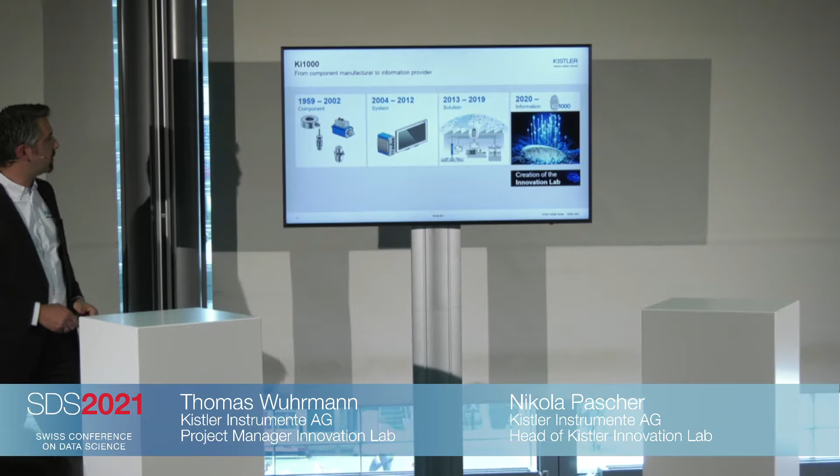Kistler has quite an evolution behind it already, starting in 1959 as a component supplier, so pure sensors and not much more into the whole measuring chain. This lasted for a couple of years, but in the last 20 years there were several transitions taking place. By 2004, the company made the transition from a component to a system supplier, which was enabled by introducing several powerful platforms, such as an embedded platform and software corresponding to it. The next step was the step to a solution provider.

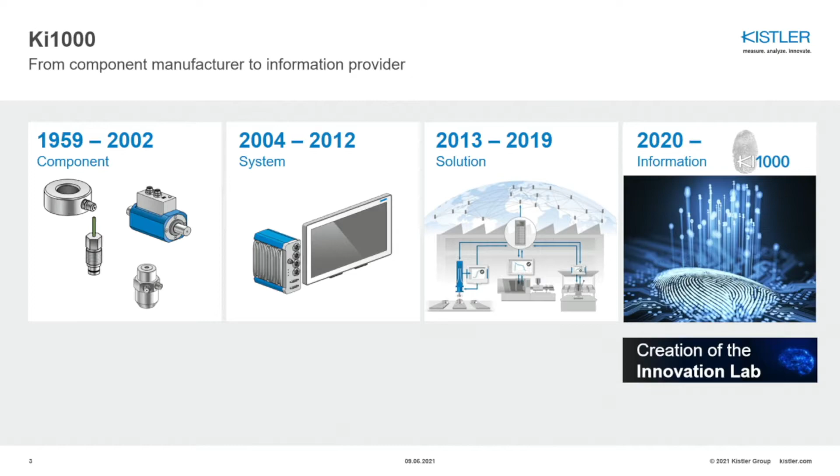This was basically the step towards IoT business and cloud business. The most recently taken transformation finally ended up in becoming a provider of information itself, so data-based services mainly, and also our digitalization topics were touched in that transition. Exactly by that time, the creation of the Innovation Lab was done in order to push those digitalization steps into the way of data science.

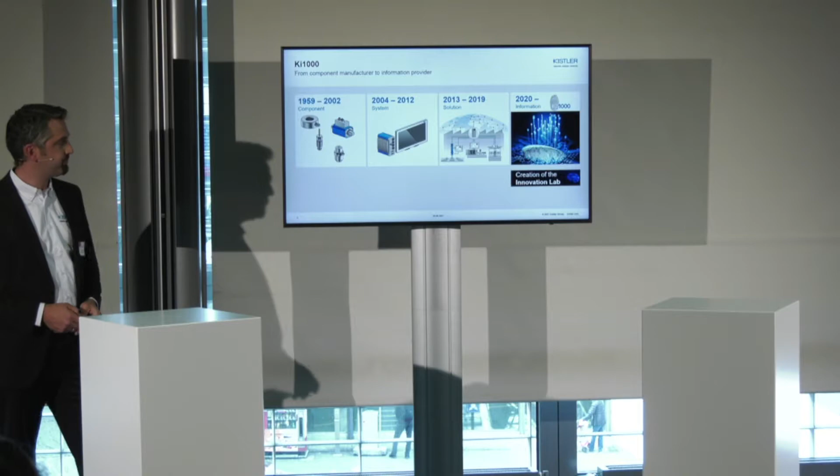Turning data into value. That's basically the vision behind the Kistler Innovation Lab. We want to unveil the full potential of the data by combining sensor technology, where we are strong from the history, including domain knowledge and data science.

Kistler started in very small niches, expanded to other niches, but also expanded in more and more applications around those niches. What was missing so far was the data science part, or actually it was just done within our own conceptions, but not focused. This is one thing which was really introduced by the Kistler Innovation Lab.

What is unique about Kistler is also that we have experts in every field, such as the tech side. We have a strong technology stack, starting from the sensor to the data acquisition systems, data management systems, but also analytics. We are also in various applications, so we have a broad field of expertise in domain know-how, which is key to success for most of our projects. Obviously, we have strong business support as well. All in all, the shared strategy and goal is key to success.

The project I'm going to deep dive into now is luckily located in Kistler itself. We actually had a customer in the production of our own sensor production. So the domain business was strongly pushed from that side, and we had easy access, which is not always the situation in such data science projects. The tech side was mainly driven by the Innovation Lab, but also supported by several other departments. Finally, the business side is covered by a focused business unit called Advanced Manufacturing, which serves exactly such situations with sensors and data acquisition systems, or even complete solutions.

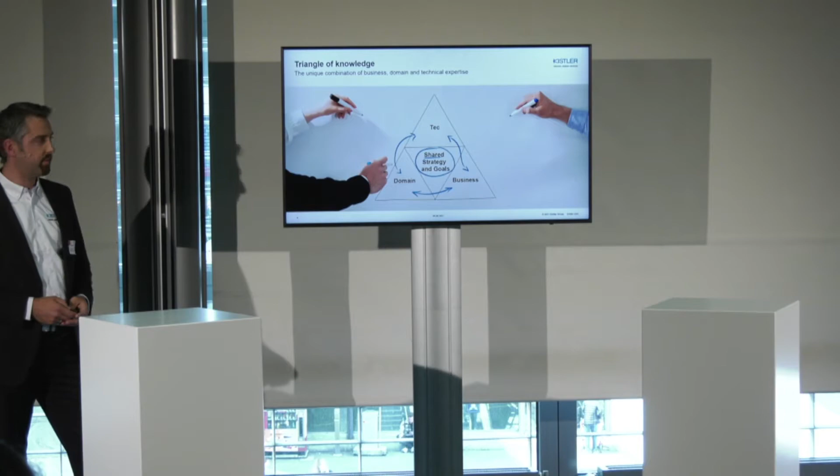Okay, so let's dive into the project. As a start, I want to quickly show you a video which explains quite well the whole situation and setup.

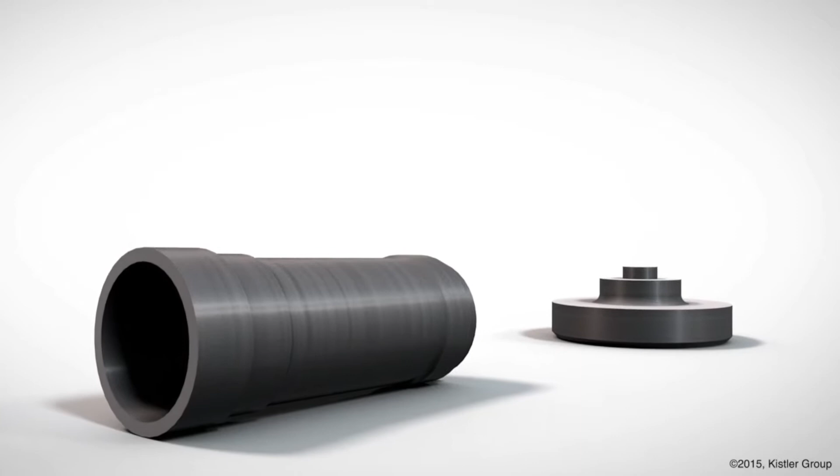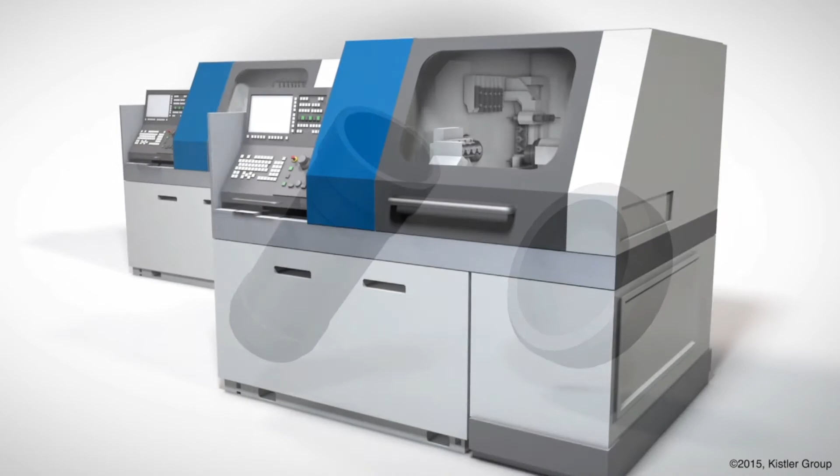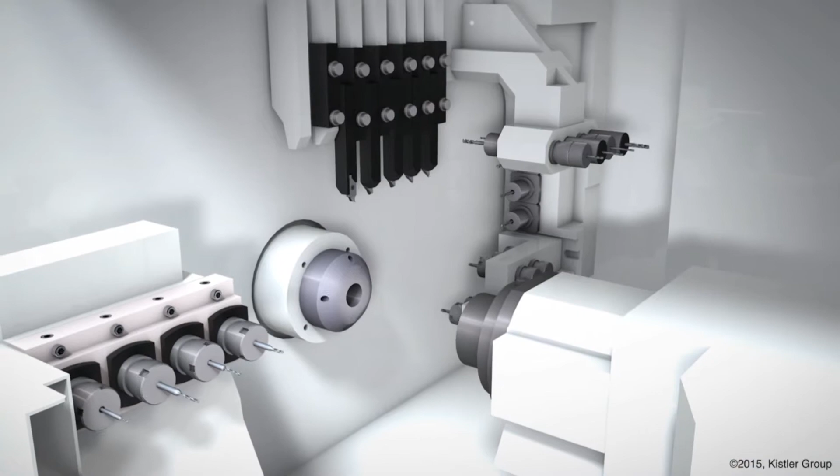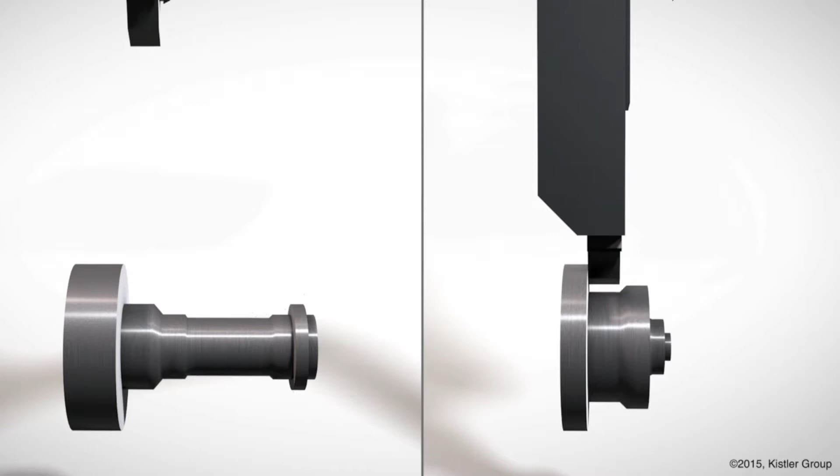The production of very thin-walled and small workpieces with wall thickness of only 0.035 millimeters is our specialty. They are usually made of high alloy steel or superalloys. The production of these parts can only be realized with precise computerized machines. Our mechanics' core task is the manual production of highly precise tools and the setup and programming of the CNC machines. Setting up and tuning the machines can take up to 5 hours. By contrast, completing a workpiece only takes about 2 minutes. Most of our workpieces have a diameter of 0.3 to 10 millimeters. The smallest drillings that can be completed true to size are 0.2 millimeters. Already, the smallest force effects can cause deformations and make a workpiece unusable.

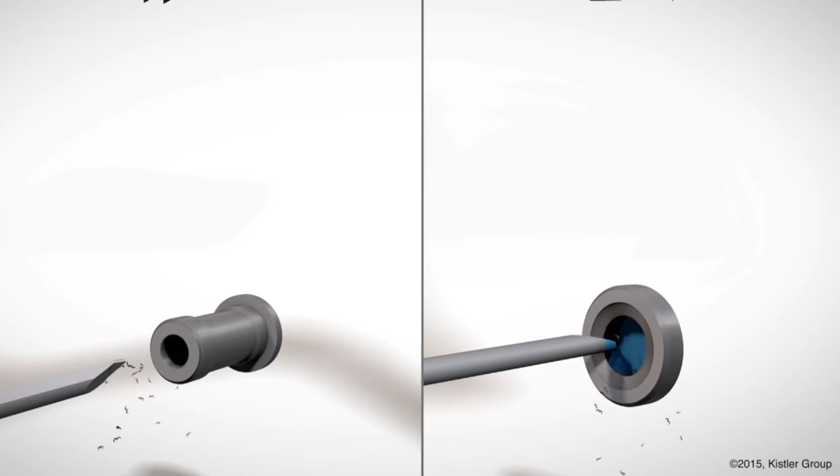Our workpieces are continuously monitored during the production process. We only allow deviations of a few micrometers, which are invisible to the eye.

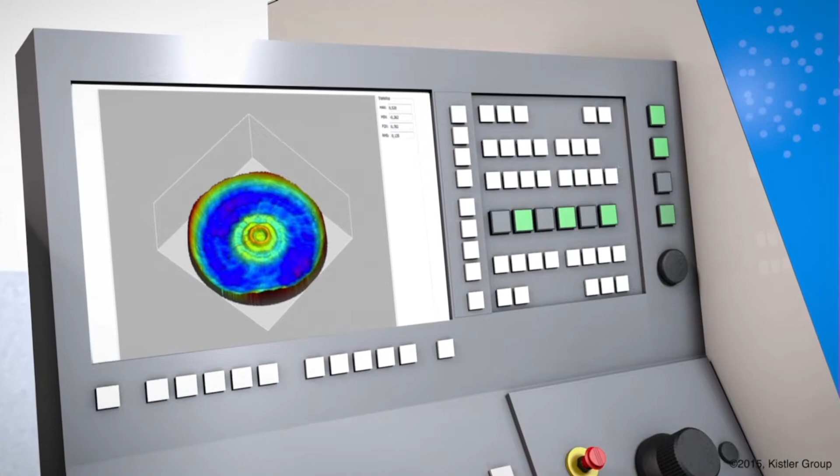The slotted spring pin, as well as the membrane, are the centerpieces of our sensors.

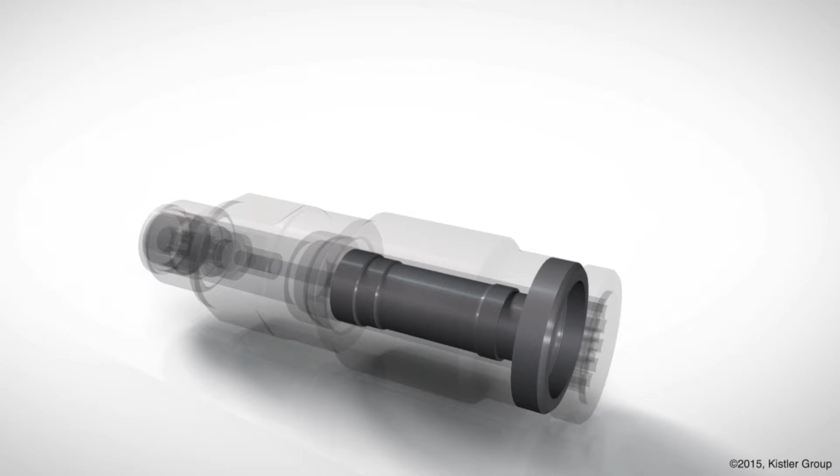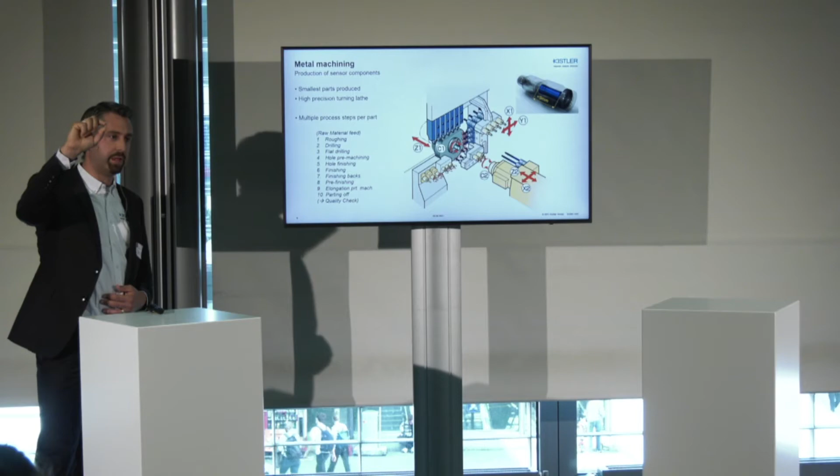What did we see in that video? I want to point out some things. First, this is actually the piece of metal which we are going to produce. It's really small, and the maximum dimension is just a little bit below 1 centimeter. Such high precision tooling is only achieved by high precision turning lathes, the machine itself. On this side, you can see several drillers, but also cutting instruments, and the whole machine is completely automatized.

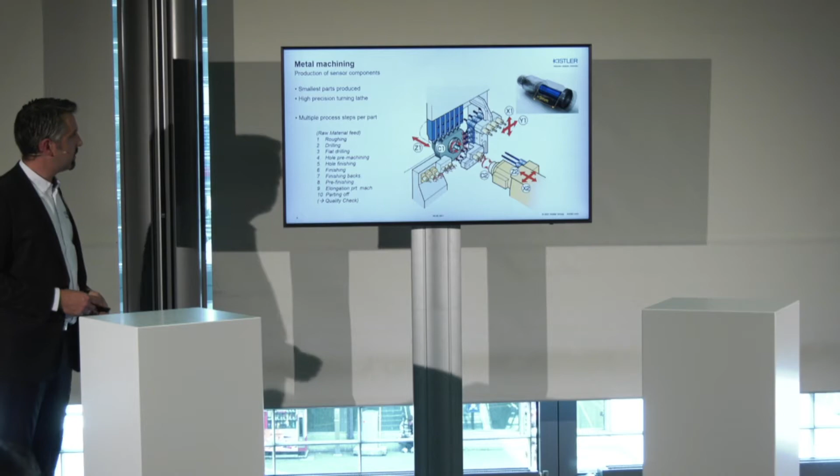Now coming to the process in more detail, producing such a piece involves a sequence of process steps. Starting with the raw material feed, there's first roughing and drilling, then fine-tuning, surface machining, and finally parting off, followed by the quality check.

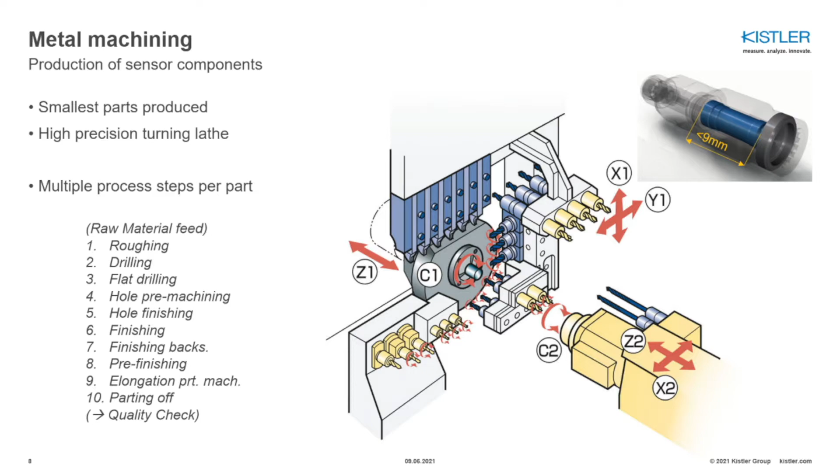The challenge is exactly around those points. We have several process steps before we even have the part finished, so in every process step something can go wrong. On the other hand, quality is actually checked just subsequently. So whenever we start producing a part, we're having the quality check at the same time. In the worst case, we're about to lose up to 3 or 5 parts if the quality was bad.

And the last thing is, for the same reason, the manual machine parameter corrections. They are actually done preventively or subsequently, since we rely on the quality measurements there.

So what is our goal? The goal was the prediction of the part quality already during the processing. On the other hand, and this is very important for the production itself and the development of such sensors, identifying which process step is the most fragile, causing an issue for the quality. In order to do so, we have to measure and analyze process parameters.

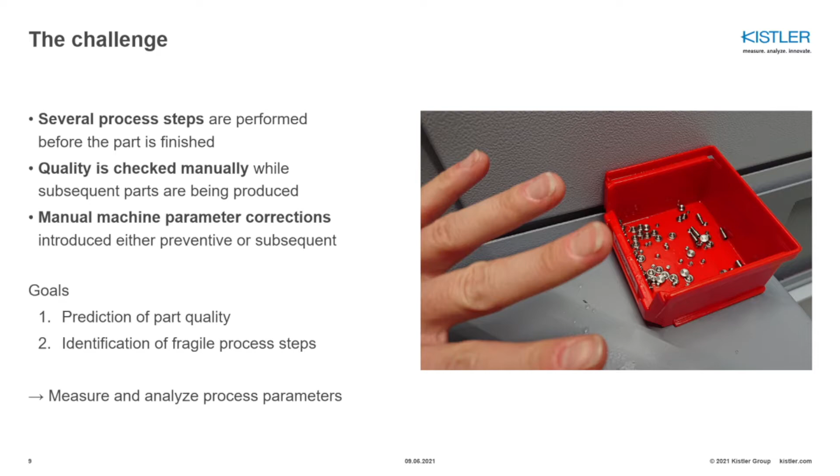So what is our process parameter in that case? The most relevant I want to introduce here. Think of a situation in your kitchen. You're taking your old knife, have a nice tomato, and you're going to cut it. You will get a result, but it's not very nice. So maybe you take a sharp knife, and it goes through the whole tomato like butter. Quality is good. That shows quite intuitively why cutting force, the force applied by cutting, is really an excellent parameter to characterize not only the quality, but also the tool itself. And that's what we are going to use.

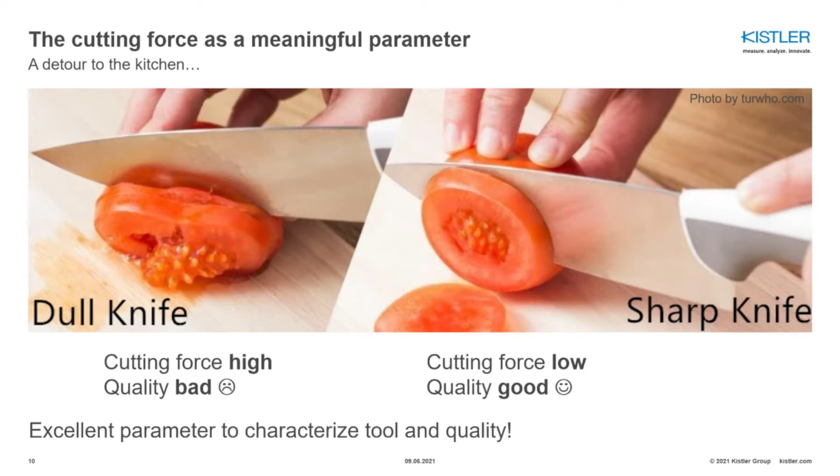So what we can do is take comparisons within such process steps, or also across multiple process steps.

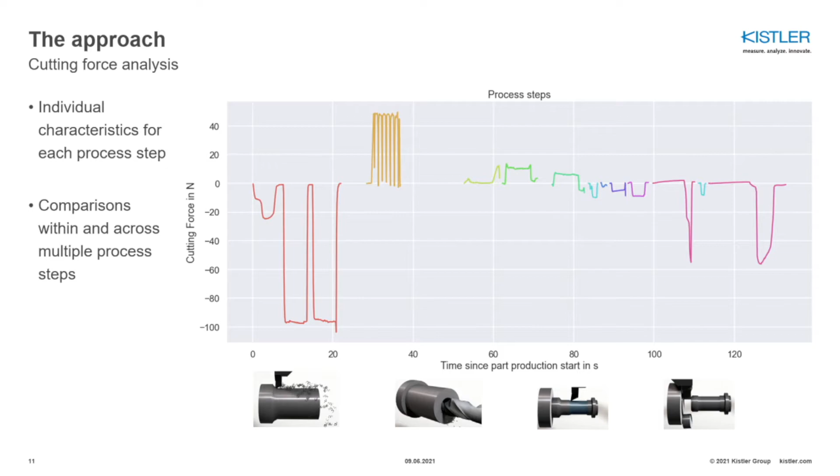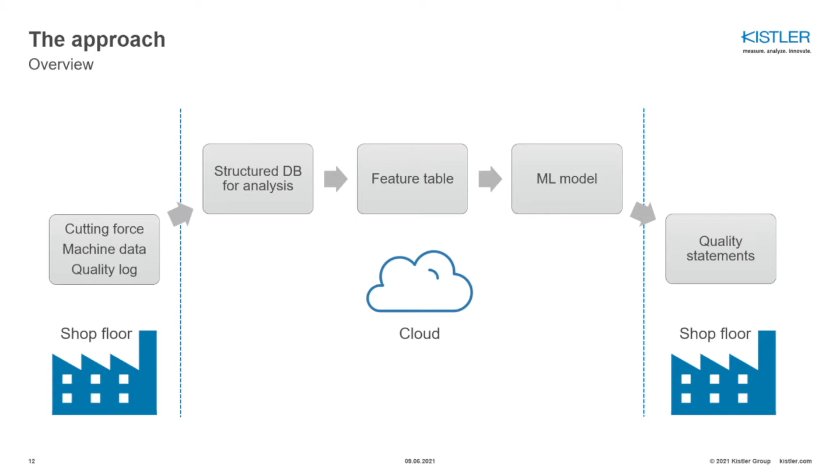And here I want to quickly introduce how we did the data-driven approach. As an input, we had the cutting force, but we also took the machine data alongside it. And finally, we get some labeling out of quality logs - though they are actually just a sequential list of findings corresponding to the parts.

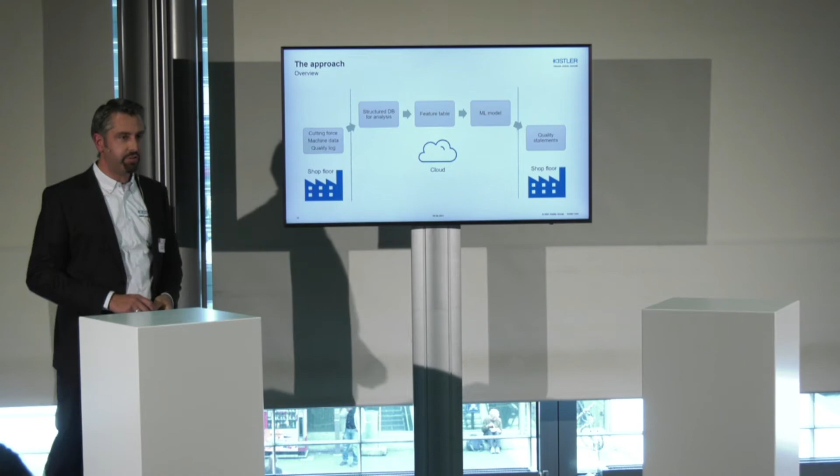So we leave the shop floor and go now out into the cloud environment, where we introduce a structured database for the analysis, which is the base for the extraction of features, serving a machine learning model, and finally giving back to the shop floor the results in terms of insights or reports.

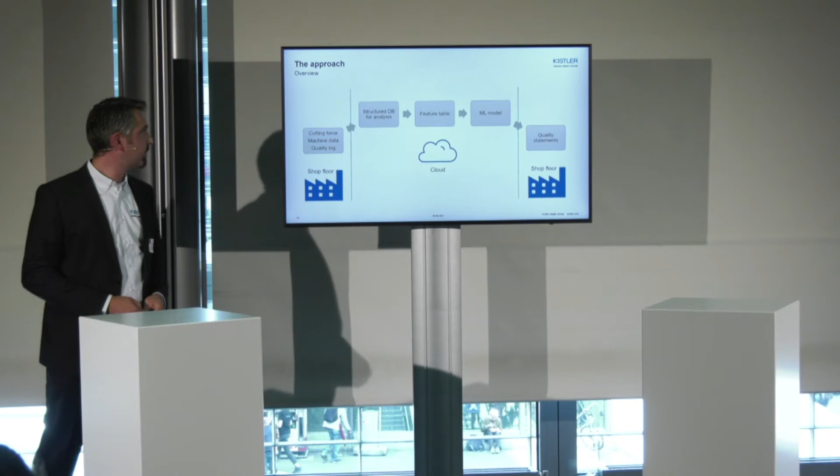So now we dive exactly into that one. Let's start with data preparation.

In here, the business understanding was very challenging from the very beginning, and we invested a lot of time on that. This is due to the fact that we first had to understand where such a part processing really started, and when it stopped. We had manual interruptions, several of them, just because the operator is doing something else to prepare the next sequence of steps, or it's stretching the whole process in terms of timing.

As an input, we had even unstructured data, continuous data, but also discrete data. They were not nicely matched. The quality log, as I already said, is just a list.

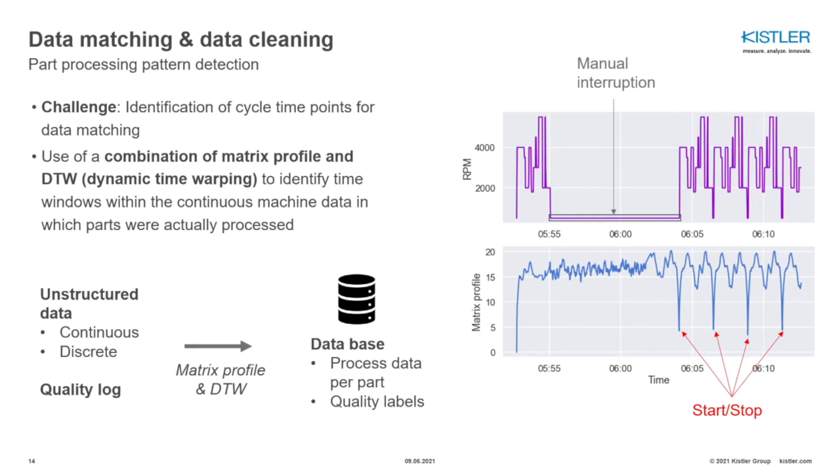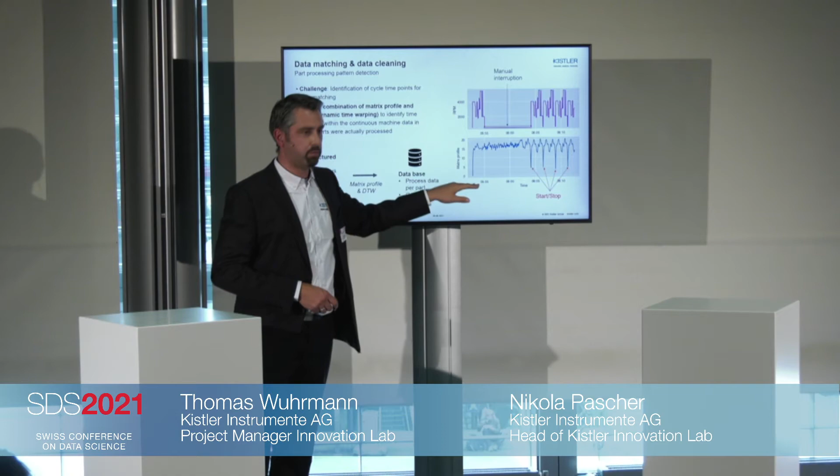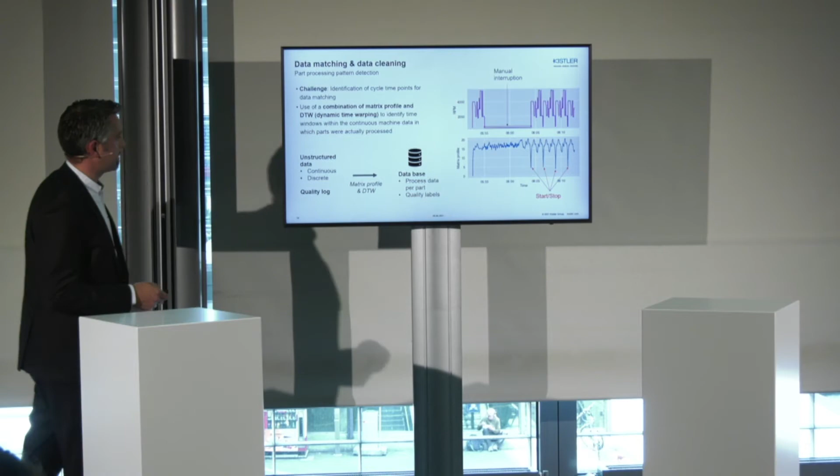So what we use is a combination of the method called matrix profile and dynamic time warping to identify windows of interest. On the right-hand side, you see the reference pattern, and the output of the matrix profile for a perfect fit would be zero. We identify start and stop sequences when the pattern is very similar to a reference. Finally, by that approach, we achieved a database for process data per part, all combined, with quality labels together.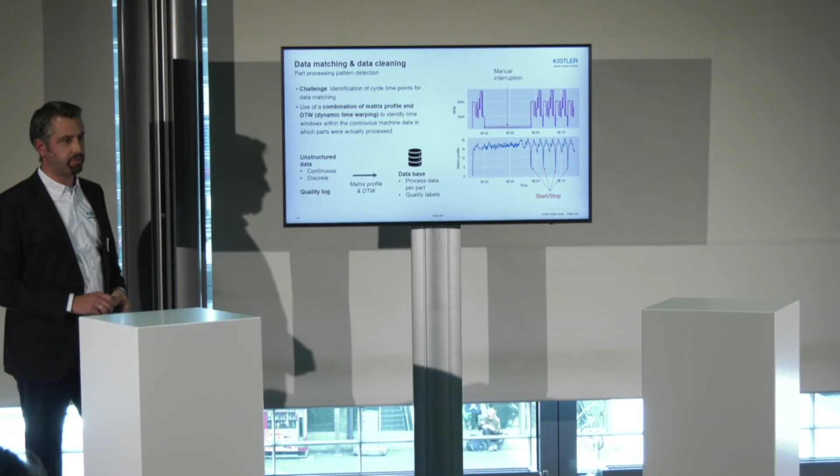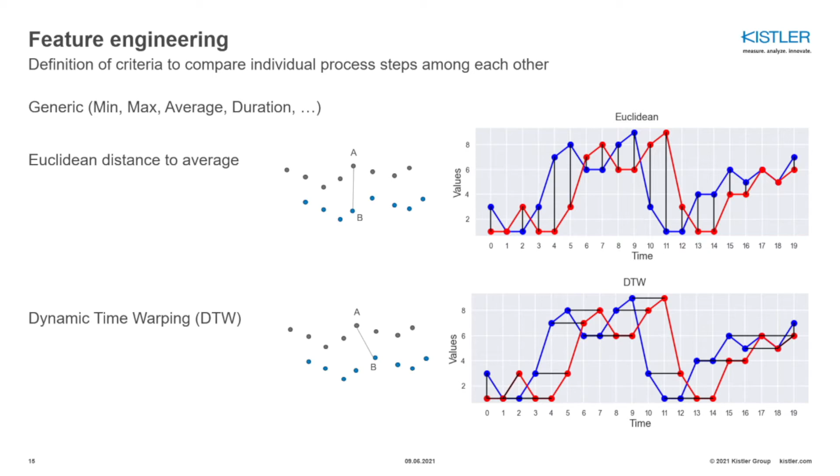Now I want to get a little closer to the feature engineering, which is again strongly driven by domain know-how. But for that approach, we also introduced generic features, obviously minimum, maximum, average. I want to point out two more: the Euclidean distance to average, which looks at the distance to an average on a certain sample time, and also the dynamic time warping, which takes into account time-shifted situations between a reference signal and a signal under observation.

So we have that feature table, with a lot of insights inside. Let's have a look at the evaluation.

Once again, the turning lathe is a highly engineered machine, so the process should generally be robust. But the cutting force is also an excellent parameter to get deep insights into the process.

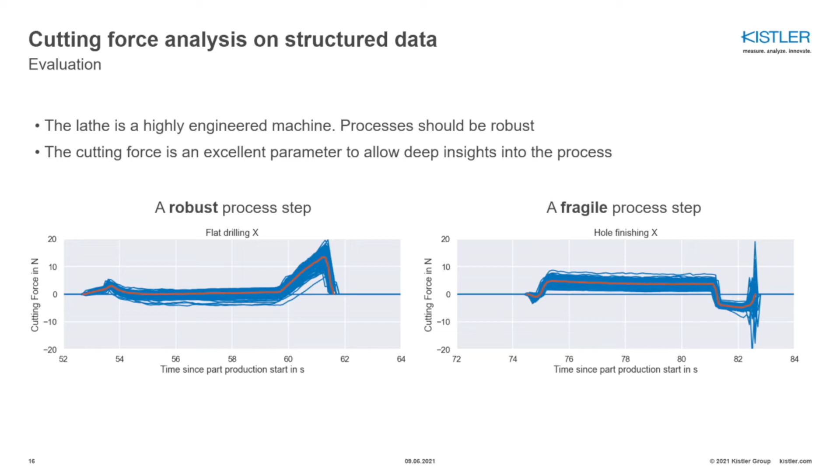As a visualization in here, one can already see on the left side a robust process. This is the red curve, the average pattern, and around it we have several single measurements of single parts. There is the deviation, as usual, but they are actually following that signal quite well.

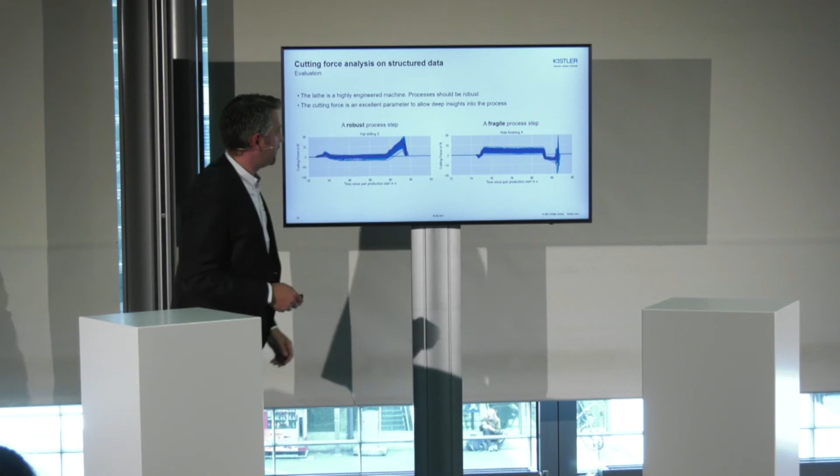A fragile process, on the other hand, shows a lot of deviation toward the very end. Effects like that we are taking into account.

So our first goal was quality prediction during the process. Once again, quality issues are very likely if at least one of the process steps in the machine is not performed correctly, differing from what we expect.

What we used is a machine learning model, XGBoost, for the classification. As usual in production, everything is optimized, so we did not have too many bad parts. That's why we also used a class handling method, SMOTE, synthetic minority oversampling technique.

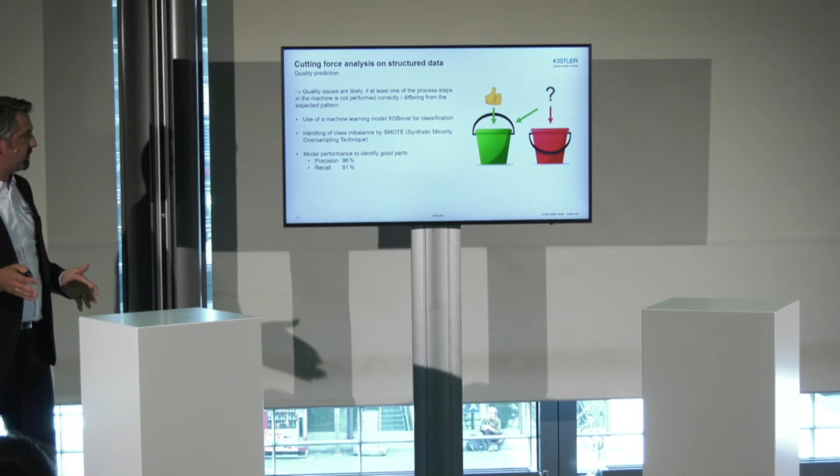The model performance we can give here: identifying the good parts was quite good, with precision around 96%. So what we get out of that is we can say quite confidently this part was a good one and put it directly into the green bucket. On the other hand, if it's not clear that it's a good one, we can bring it back to quality inspection for a closer look and put it into the right basket.

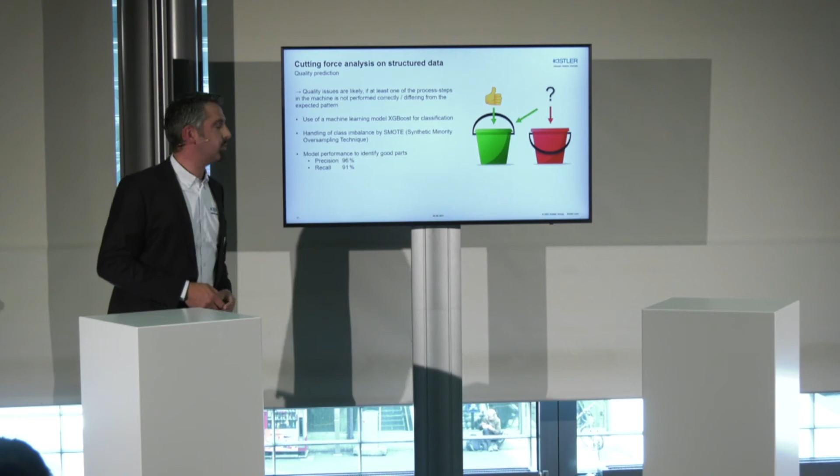So the other goal was identifying fragile process steps. For that, we introduced an error score, which is an indicator of where to optimize the process.

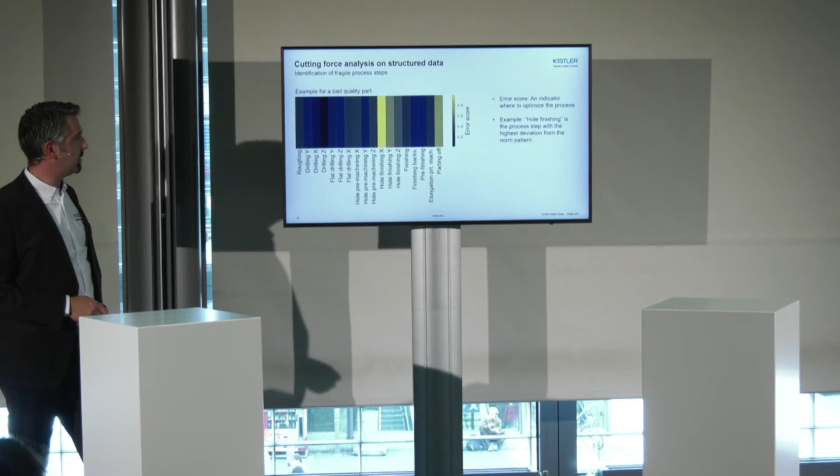On the left-hand side here you can see an example of a bad quality part with all the process steps in the whole sequence. With a high error score, it indicates for this example that the hole finishing process was mostly affecting the bad quality, or let's say the error source. Obviously there are some more factors, but there is a clear indication of where to start further investigation.

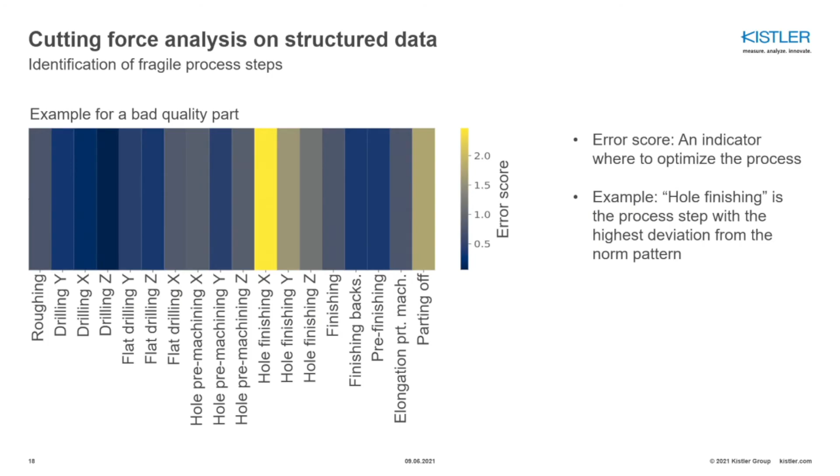So let's come to the key takeaways of the project. Our production is currently acting in a preventive way, so optimization is done by limiting the number of parts per tool in order to avoid bad quality. What we are currently working on is in-production control by introducing a feedback loop on the cutting force itself, and also automatic sorting of good parts from bad quality parts.

Take a look into the future. We have the predictive part, so we will hopefully be ready to plan and optimize tool lifetimes, or also observe other parameters by cutting force monitoring.

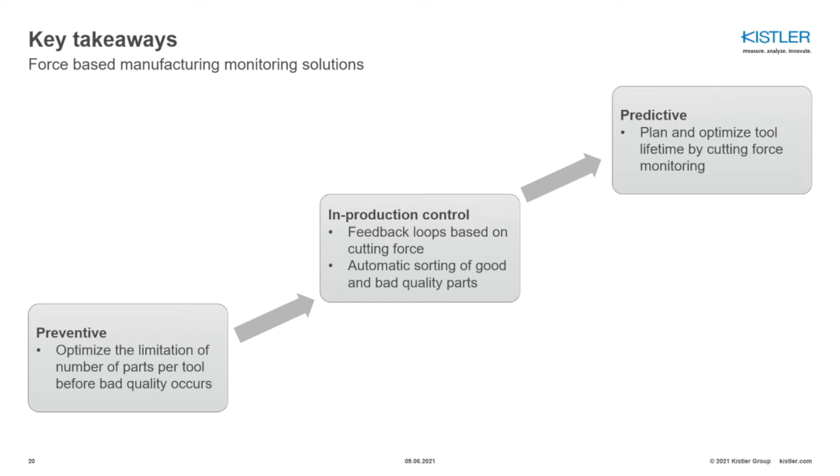How could such a solution look like? By introducing such sensors into the tool machines and the tools, we can prevent machine damage and waste. We can monitor trends in individual process steps, but also predict and optimize tool usage lifetime.

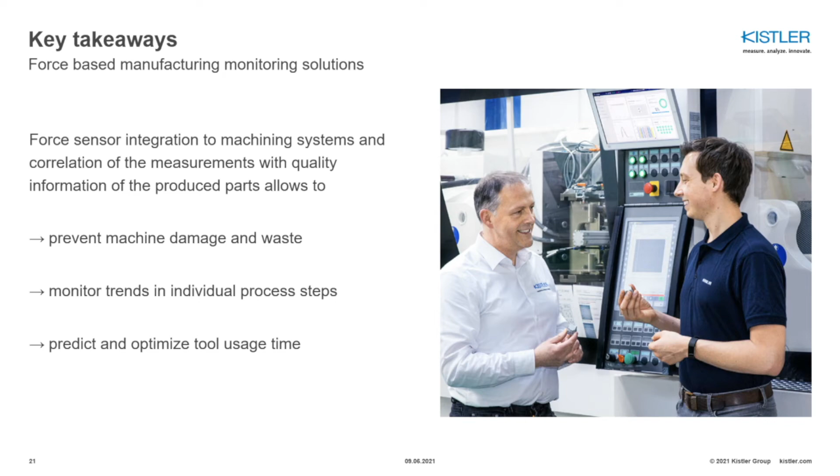Yes, and that's basically it. Thank you very much.